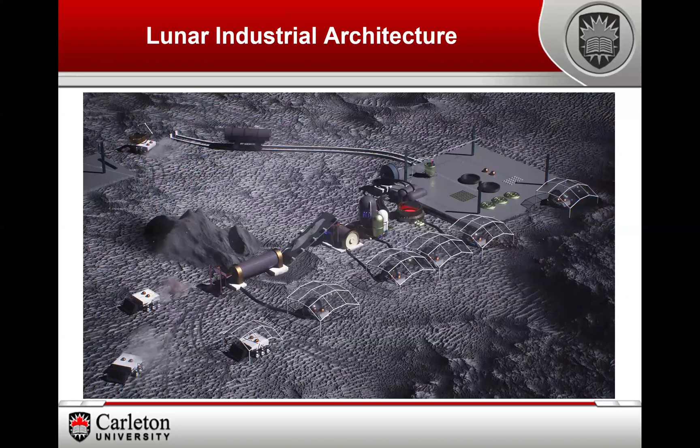The idea is to utilize the resources of the moon, build machines that can mine the moon and then process that material into something useful. One of the things I'm particularly interested in is how do we do this at low cost? And of course, sending all this infrastructure to the moon would be very expensive. So one of the techniques I've been working on is an attempt to figure out how to build a self-replicating machine that we can send to the moon and then build up an industrial infrastructure very quickly and very cheaply.

So moving to interstellar missions, probably the most famous interstellar mission concept was that performed by the British Interplanetary Society in the 1970s, called the Daedalus Starship. It was a two-stage flyby mission of Barnard's Star. Barnard's Star at the time was thought to possibly have planets around it. We now know that it doesn't. So they would have headed off in the wrong direction, but never mind.

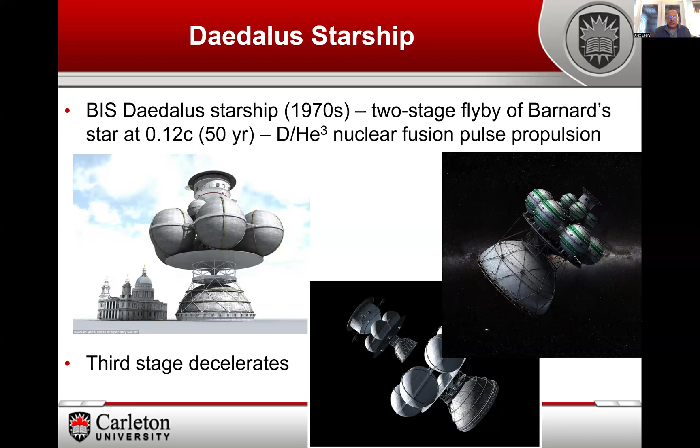So the propulsion system was to use deuterium helium-3 nuclear fusion in a pulse propulsion system to basically accelerate to 0.12 C and thereby cover that distance in about 50 years or so. Subsequent to that, there have been other ideas; this was originally a flyby. If we added a third stage with much mass increase, we could then decelerate for an interception mission to any other type of star system.

More modern thinking has moved away from nuclear pulse propulsion towards what is known as laser-propelled light sails. The idea behind this is you have a phased laser array. One possibility is the free electron laser. One of the advantages of the free electron laser is that the laser emission frequency is tunable from X-ray all the way to microwaves. The advantage of light sails is that it requires no propellant. You don't have to take the propellant with you. And Robert Forward in the 1980s, I think, developed a concept of a light sail which could decelerate at the target.

What you're trading off against with these light sail concepts is that you require very, very large sail areas and also large diameter Fresnel lenses to focus the laser light from Earth orbit out to interstellar distances. And this is kind of similar to some ideas that have been proposed today for a solar shield to be placed at the Sun-Earth L1 point to basically refract solar energy away from Earth to reduce global warming. Now, obviously, these large scale engineering concepts are fantasy today. But if we can develop self-replication technology, they become viable.

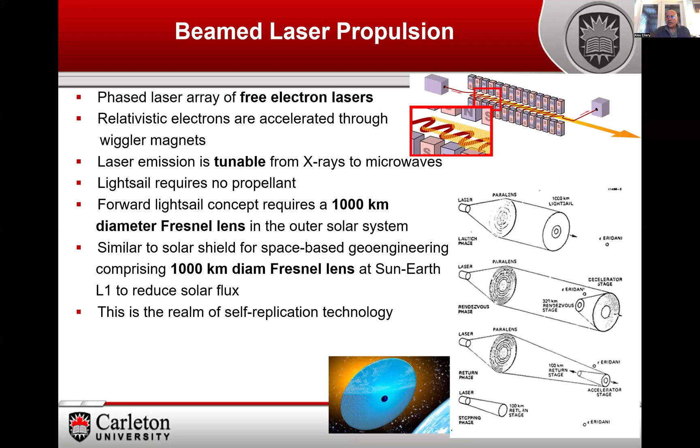So, okay, let's look at the various types of missions we can imagine. Well, there are three types of interstellar mission. The first one is the flyby. I've already mentioned this, and so we've got Breakthrough Starshot, which has recently been cancelled, but was an idea for a few years to use again laser-propelled light sails. I mentioned Daedalus as one, but there are also various other kinds of approaches to interstellar flybys.

As I said, if you can add, say, a deceleration stage to either Daedalus or the laser-propelled starship, we can then employ the second type of interstellar mission, which is in situ exploration of that extrasolar system. It makes sense to enable this kind of capability because we could slow down and survey an extrasolar system to observe the various planets that they have, and also to perform astrobiological surveys.

And the third type I've divided into two parts. The first one, part A, is if we encounter some kind of extraterrestrial intelligence, and the second part is if we encounter some kind of extraterrestrial artificial intelligence, and the way in which we would interact with those would be very different. But all of these types of missions involve a 50 to 100-year transit phase, and so this is what I'll focus on for the rest of the talk.

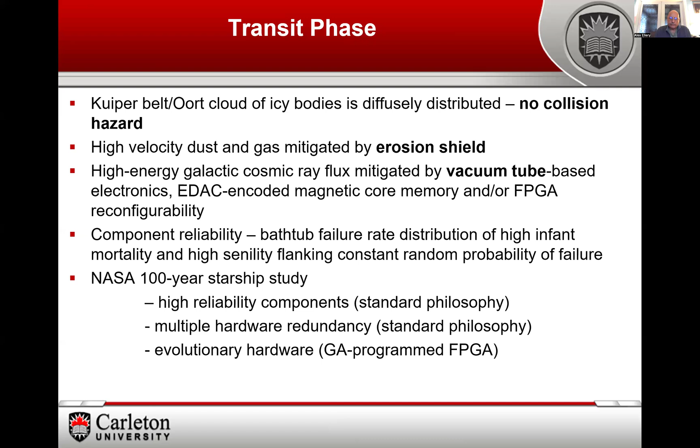And again, I mentioned the NASA 100-Year Starship study. Their approach was to use high reliability components, which is a standard philosophy in spacecraft engineering, and multiple hardware redundancy, which is also a standard approach in spacecraft engineering. What was new in that study was this idea of evolutionary hardware, where FPGAs would be programmed through genetic algorithms. So there's a diminishing return on redundancy.

So what we need to do is broaden the way we look at this by looking at the concept of availability. As you can see there, availability is defined by this fraction, and the terms are mean time between failures, which is a measure of reliability. So this is the traditional approach. But there are other factors as well. Mean time to repair is a measure of maintainability. So this implies that if you have some form of onboard servicing, you can reduce that towards zero.

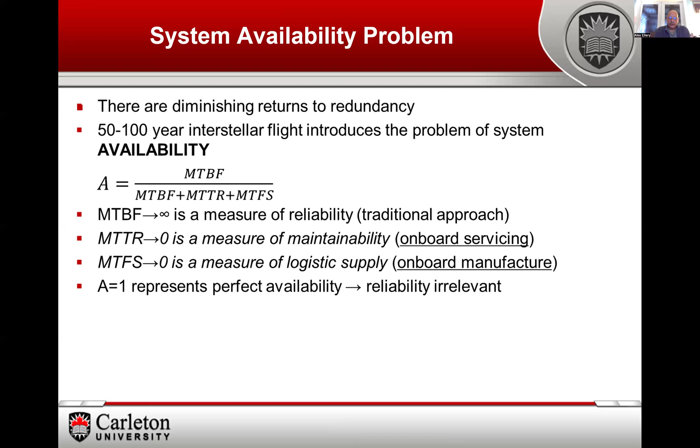And of course, the third one is mean time for supply. This is a measure of logistic supply. And again, you can either have a set of spare parts, or you can manufacture them on board on an as-needed basis. What we're aiming for is for availability to be one, so we have perfect availability. And this essentially renders the reliability aspect irrelevant. So we want to focus on maintainability and supply.

Now, the Daedalus starship actually anticipated this and was supported by several what they called wardens. These were free-flying servicing robots, similar to some of the free-flying servicing concepts that we see today, that I worked on during my PhD. So the lessons from space servicing are that we need to standardize our interfacing of modules. We need to define mechanical, electrical, optical, and thermal interfaces.

And in fact, this is a big move in Europe at the moment. The European Union is pushing for a new concept in spacecraft engineering, which is basically a series of boxes, and we plug these boxes together to create a reconfigurable spacecraft. This also simplifies the robotic handling, because if you have standard interfaces, you can design your robotics to simply change those modules in and out as needed.

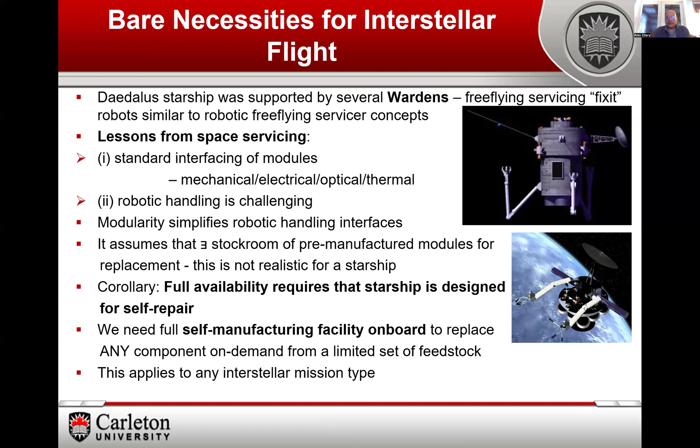So this assumes that we have some kind of stockroom of pre-manufactured modules to allow replacement, but this isn't realistic for a Starship. So if we want to have full availability in a Starship, we have to design it for self-repair. And for this, we need a full self-manufacturing facility on board, to allow it to replace any component on demand from a limited set of feedstock. And this will apply to any interstellar mission.

So it is crucial, if we want to have feedstock, to try and control the range and the amount of feedstock we need to maintain that Starship. And this is where the demandite concept comes in. I'll talk about that a little bit later.

But there are 7 basic subsystems on board a spacecraft. I'm not going to read through the list, but in essence, approximately 10 basic materials can supply the full functionality for all the subsystems of a generic robotic spacecraft. In addition, any kind of onboard fab lab must be able to manufacture the feedstock into the replacement components, including for itself. So it has to be able to self-maintain.

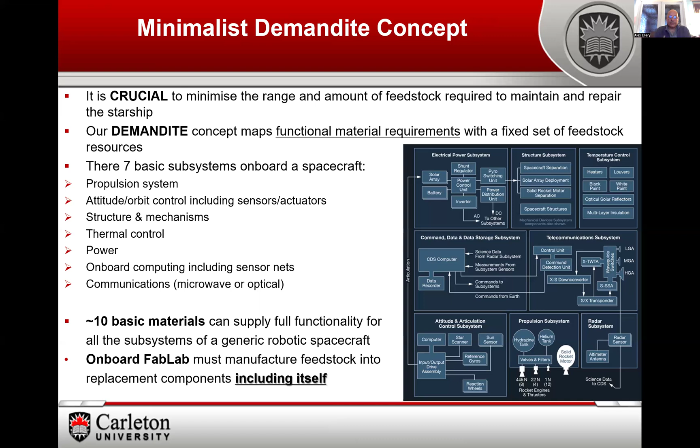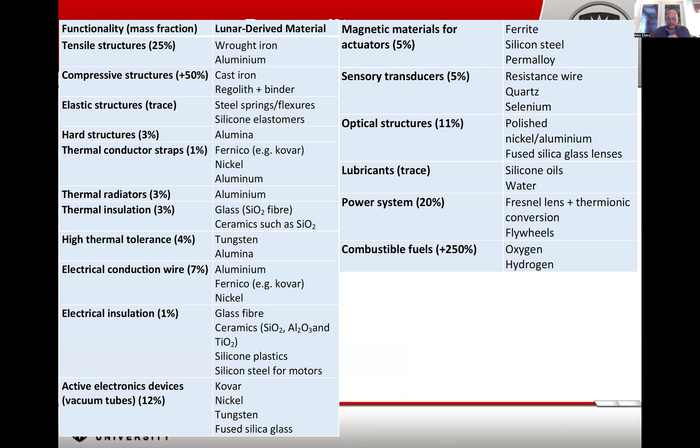This is the Demandite concept. This is actually derived for the moon; we've been working on lunar applications. On the left-hand side, you see the functional capabilities you need to build any type of spacecraft. And on the right-hand side, you see the materials that we could extract from the moon to actually implement those functions. As you can see, it's a relatively small number of materials we can utilize to achieve this. And I'm going to focus on just one.

This is the industrial ecology. Again, this is for the moon. I realize this is a very busy slide, but this basically implements a self-recycling, interconnected industrial ecology, which takes raw materials from the moon and cooks them in various ways to yield various products that we need to implement our Demandite system.

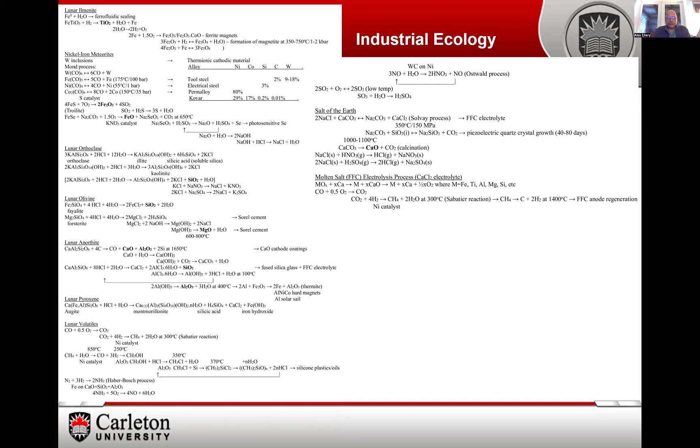So the idea behind the Starship is we store metals in oxide form. We do this because metal gets tarnished over the long term, so we keep it in oxide form for long-term stability. So we'll look at alumina for the moment. Alumina itself has physical properties second only to diamond. It's refractory, it's chemically inert, it has high hardness for tooling applications. It can be an additive to composites. For example, we can manufacture cermet, which has high strength and high temperature tolerance.

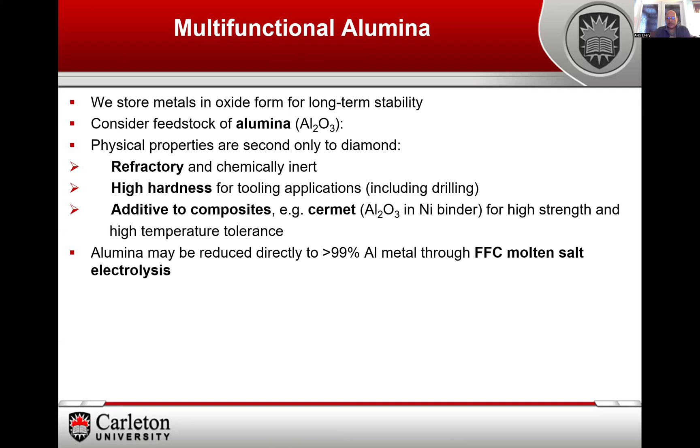We extracted 11% of the mass from the original LHS1 material as aluminium, and this is close to the theoretical maximum of 14%. Carbon monoxide and dioxide were evolved at our anode. That was because the anode was graphite, which combined with the oxygen from the reduction process, but we could potentially replace this with a non-eroding anode to get pure oxygen.

And in fact, we are currently working on a project called Oxygen, which is funded by the UK Space Agency. We're working with US and UK partners to build a lunar payload, which includes the molten salt electrolysis unit, which we're building to reduce lunar regolith directly to recover oxygen. So we're currently working on that at the moment.

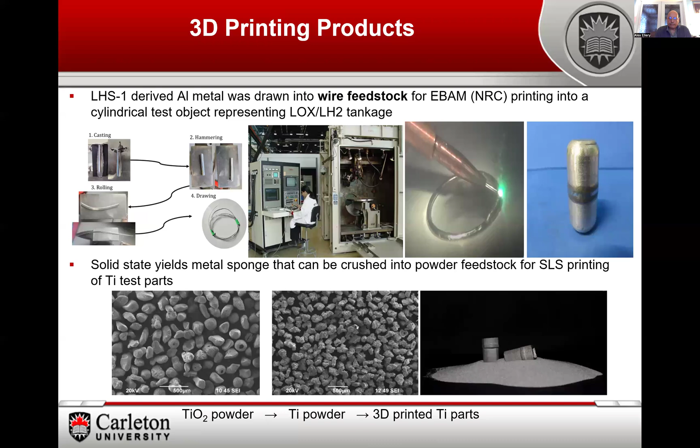So one of the things I've been interested in is how far can we push 3D printing? Is it actually a universal construction mechanism? And the answer to that is maybe. So we've been looking at self-replication, as I said. On the right there, you see the RepRap 3D printer, which can print its own plastic parts.

And if we wanted to convert that into a full self-replicating machine, we would then have to be able to print the metal bars. We'd also have to be able to print the electric motors and the electronics and the computer hardware and software. We will talk about the latter three, in particular the latter two, a little bit later, but the electric motors I'll talk about in a moment.

But the idea of this is that if this is a universal construction technique, a universal constructor is essentially a kinematic machine. It can manufacture any other machine given the appropriate resources of materials, instruction, and energy. And this includes potentially a copy of itself. And this is from the original von Neumann idea that a self-replicating machine is basically a subset of the universal construction method.

We can adapt von Neumann's ideas to unstructured environments by building a suite of kinematic machines. And so all machines of production, all kinds of machines that we can build are in fact kinematic machines. A kinematic machine is a specific kinematic configuration of electric motors. All robotic machines are in fact kinematic machines. So if we can 3D print electric motors, sensors, and control electronics, all else will follow.

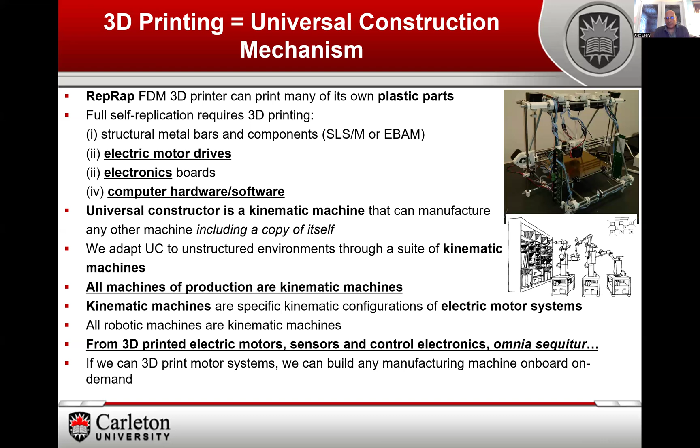So if we can 3D print motor systems on board, we can then, in theory, print any kind of manufacturing machine on board on demand. And in fact, one of the things we've been doing was to actually demonstrate that we can, in fact, 3D print an entire motor. And this is what we printed.

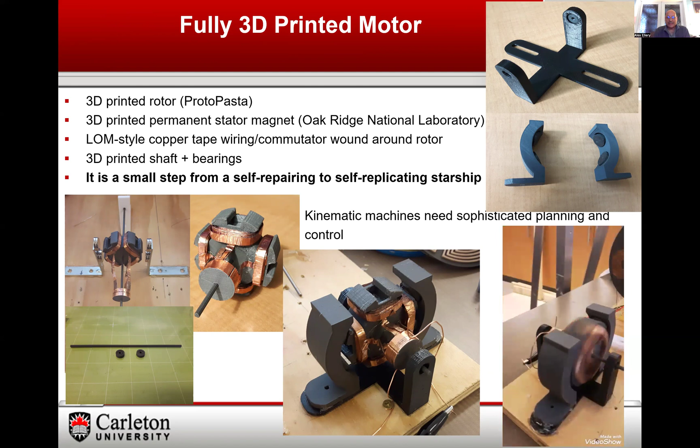It was assembled by hand, but every single part of it was actually 3D printed using different 3D printing techniques. So the idea behind this was to show that complex machines can be 3D printed. So let's go to the electronics.

Well, as I alluded to earlier, we've been looking at vacuum tubes, and there are various reasons for this. The primary reason is that trying to build a solid-state electronics foundry on the moon or on board a spacecraft would be extremely difficult. Solid-state manufacture requires a lot of different chemicals and a lot of different processes, which are very, very complex. So this is not really suitable for manufacturing electronics.

Vacuum tubes, on the other hand, are relatively simple of construction, and they're potentially printable. So they're thermionic devices where we can use a limited set of materials. So we can use Kovar resistance wire. We need a tungsten cathode coated with something like calcium oxide and alumina, which I missed out there. And we can use nickel electrodes. And this can all be placed into an evacuated glass envelope. And all these materials are derivable from the lunar resources.

So if we look back in time to Colossus, which was built at Bletchley Park, it comprised 2,400 vacuum tubes, actually designed by Tommy Flowers, who is a very underappreciated engineer, who I think deserves greater recognition. He tends to be overshadowed by Alan Turing.

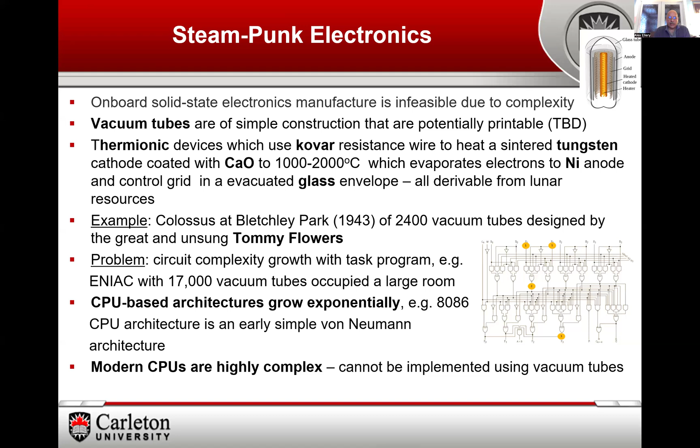So we've been looking at neural nets. There are a couple of approaches we can use. One is, instead of trying to build a general purpose computer, we can actually implement specialized circuits which are distributed. This is inspired by octopus brains; the octopus has 9 brains, 1 in each arm plus a smaller one in the head. So potentially we can implement a level of intelligence using a distributed set of specialized circuitry.

The other advantage of neural nets is the software is built into the neural net architecture as the weight matrix. And finally, the complexity of the network grows logarithmically with task design. So we can potentially keep control of the footprint of the neural network. So what we're interested in is implementing neural nets in hardware. And this is what we've done.

We've used a modified Yamashita Nakamura printable neuron. It has fixed synaptic weights. And as you can see, it comprises only a few different simple circuit components. And this is our modified version. It's basically a McCulloch-Pitts neuron. And we implemented 2 of these.

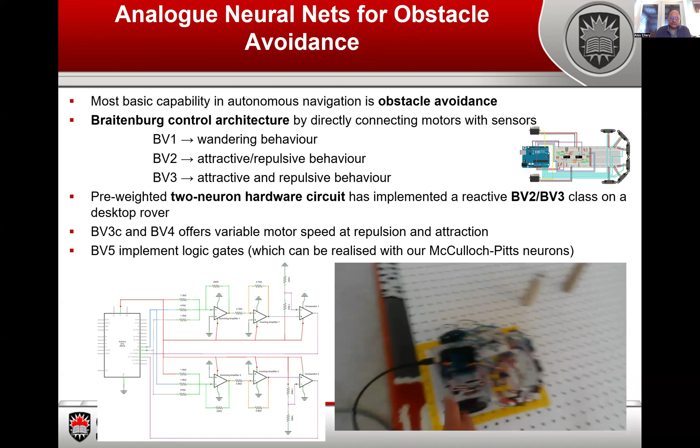So beyond that, one of the problems we had is that if we 3D print neuron circuits, one of the issues that's going to arise is the problem of tuning. There are going to be hardware variations, so if you try to print a particular value of resistance, that's going to vary to a degree. And so we're going to need some means of learning to fine-tune the weights.

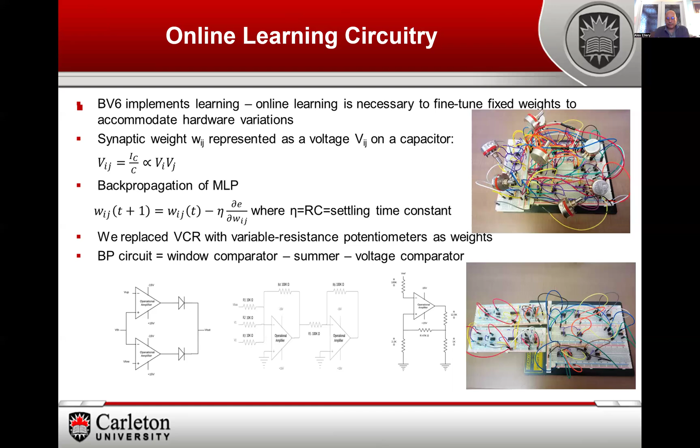And in fact, I had a student from India one summer and discussed with her whether it would be possible to build a backpropagation algorithm in circuitry. And lo and behold, this is what she managed. On the top right, that's the forward circuit, and on the bottom right, that's the backpropagation circuit. So we were able to implement the backpropagation algorithm in circuit form.

And this is it actually in action. Again, it was basically trained just to do a simple stop when it came to an obstacle. And so, yeah, we're very pleased that we managed to achieve this. The weights can potentially be updated, but not the topology. And this actually imposes limits on the learning, which potentially is an advantage, which I'll talk about a little bit later.

So one of the things we want to do next is to convert the analog neuron into an analog spiking neuron. What we're going to explore initially is a fairly simple approach, which is adding a Schmitt trigger. One of the things we're concerned about is trading the footprint of the circuitry against the complexity of the behavior of the circuitry. There are a couple of other things we want to explore, including implementing Kalman filters in neural net form, but I won't talk about that now.

So going back to our Starship, the requirements are to implement failure detection, isolation, and recovery. Now, we can do simple things like simple fault diagnosis through large data sets, but multiple faults, if they are related to a single cause, can often propagate through the system. This happens on spacecraft all the time. When we upload software workarounds, quite often there's a cascade effect of failures occurring subsequently through different systems, particularly as the mission profile changes.

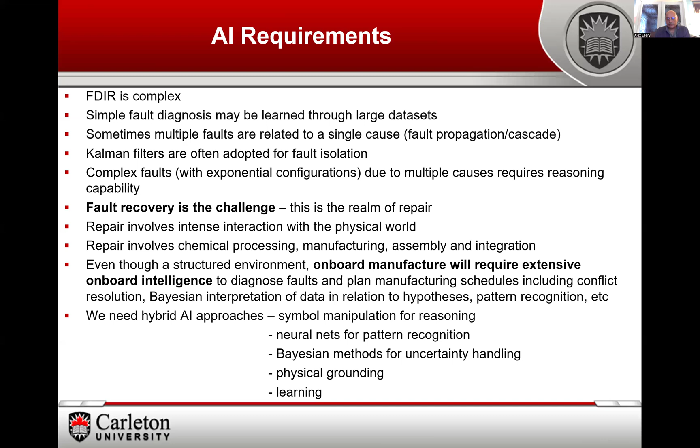I'll just mention some work we did a few years ago. One of the problems we have with training robotic machines on Earth is that when they apply to space, the dynamics becomes very different. Well, I say very different. It has the same basic form, but because we no longer have a fixed base, we have a moving base, and that dynamics has to be incorporated into the control system.

And so one of the things we were looking at was transfer learning, a neural net which had learned a forward model of a manipulator, and then adapting that to the space environment. So in effect, it was modeling what astronauts do, essentially the cerebellum of astronauts and how they adapt very quickly to the space environment. We found that, in fact, the neural net couldn't learn to adapt to the space environment.

So there are limits on what the neural net is capable of learning, or at least transfer learning into a new environment. So even though the underlying dynamics have the same form, it was unable to learn from the new input-output pairs.

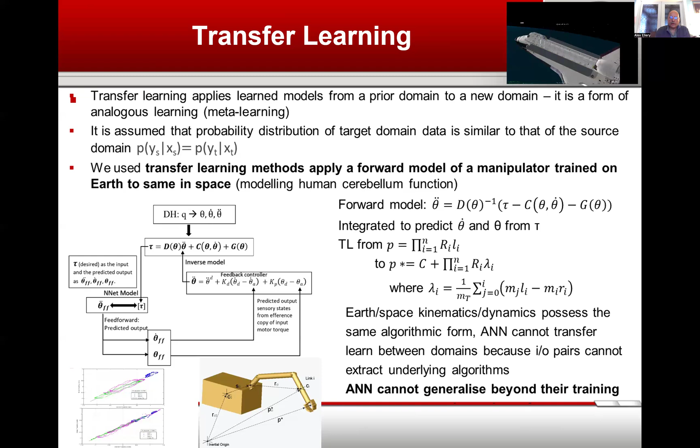So from earlier, I started looking at neurosymbolic processing, because it seems to me that we need to have some kind of symbol processing, but also some of the advantages of the neural networks, their ability to learn and so on. And of course, the Bayesian brain is another approach, not inconsistent, which looks at how the brain functions as a Bayesian system that mediates between a top-down model and a bottom-up sensory system. When I think of that, I immediately think of Kalman filters, because that's what I'm most familiar with, because Kalman filters are in fact a specific rendition of a Bayesian system.

So neurosymbolic approaches, we map symbol representations into neural networks, and there are three basic approaches. We map rules into the neural net, and there are various examples of this: the KBANN, fuzzy neural nets, Markov logic networks, and so on. There's a second one which I haven't really looked at in any detail, based on the restricted Boltzmann machine. And the third one is where we embed logical rules into some kind of tensor representation, and this is where the vector symbolic architecture comes in.

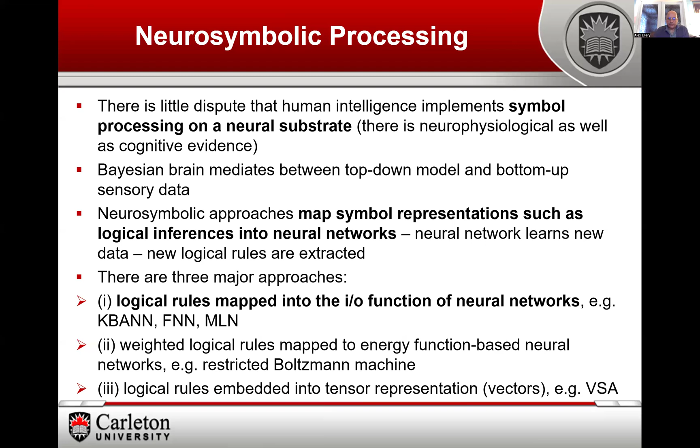So the way I see this, I think the VSA technique is extremely promising, where we can implement symbol manipulation in the neural network. And I'm particularly interested in it because it ties in very nicely with what we intend to do, which is to start building spiking neural networks. And what we'd like to be able to do is to incorporate some kind of AI-based symbol manipulation to those networks.

Now, in a broader term, what this provides us with, and I think this is very important from the point of view of having an AI on board an interstellar starship, is that we can pre-program the neural nets with prior knowledge, and that prior knowledge will shape its future learning. And so it ensures that its learning is bounded. And I think this is very important when we send out robotic envoys into the interstellar environment, that we actually employ some form of control over it. And by limiting its learning trajectory, potentially this provides a form of remote control.

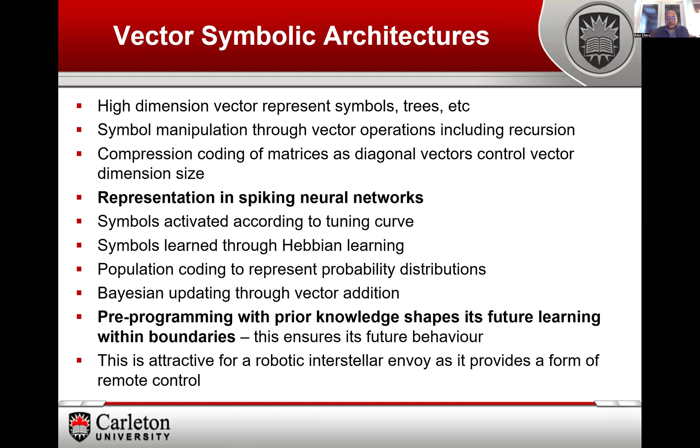So I think there are various issues. I mean, one of the reasons why we want to do spiking neural networks is because they tend to be a little bit more biologically representative, when we want to explore the distributed intelligence concept with multiple specialized small neural networks.

And potentially, I think a rather enticing idea is that given the neural response times and reaction speeds, this suggests that cognitive tasks that we're capable of have less than 100 neural steps, which suggests that potentially we can build symbolic systems which again have a relatively small footprint. So I think VSA offers enormous promise for implementing symbolic capabilities to spiking neural nets.

We need to have learning, but that learning has to be directed through prior knowledge, essentially pre-programming. We need to ground those symbols into robotic systems that interact with the real world.

And there's also an interesting facet to this, in that if we are interested in implementing human level intelligence, the question then becomes, is human intellect or human reasoning actually logical and Bayesian? And there is evidence to suggest that it's not. For example, the Wason selection task and prospect theory is also based on that our risk aversion tends to skew us away from Bayesian behavior. And I'll leave it there.